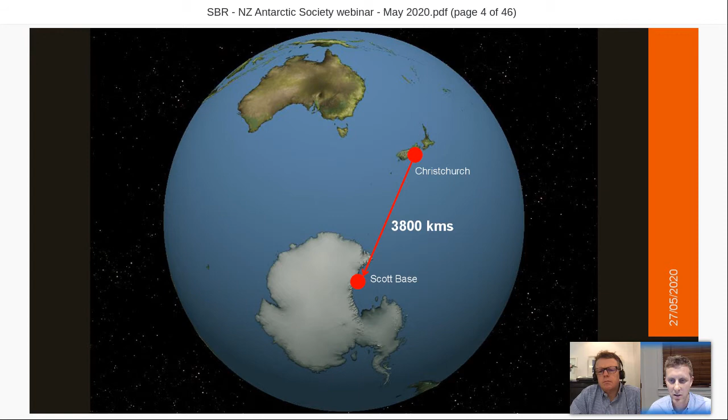Scott Base is located at Pram Point on Hut Point Peninsula, which is on Ross Island in McMurdo Sound. You can see it's at 77 degrees south and 166 degrees east, so it's the furthest southern point a vessel can travel to if they can get through the sea ice. We're very close to McMurdo Station, about 3 kilometres away, and we work very closely with the National Science Foundation and the US Antarctic Program, collaborating heavily on logistics particularly.

We have a thing called a joint logistics pool, where we share assets such as vessels and aircraft to move people and cargo to and from the stations, but we do operate independent stations. Collaboration is a really important part of working in Antarctica, and we work closely with a lot of other national Antarctic programs. That's really the only way things work well down in Antarctica, particularly for search and rescue events and so on, where everyone bands together and helps each other out. It's a very collaborative effort, especially for a lot of government agencies.

So the new base is intended to be located at Pram Point. We did look at other places to position the base, but we came back to Pram Point being the best location, and that's for a range of reasons.

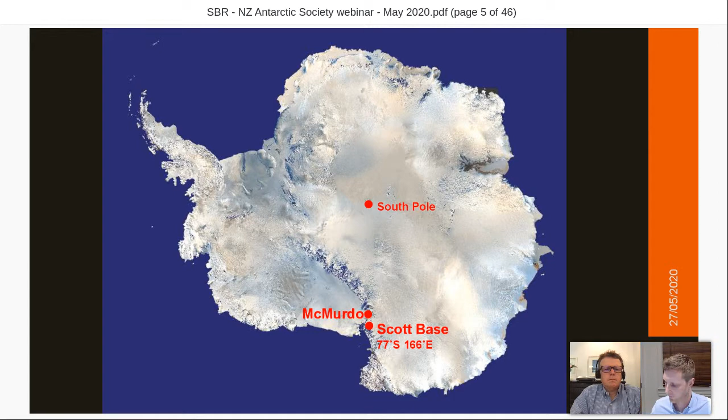So the history of Scott Base. Forgive me for those in the society who know this well, I'll give a high-level overview.

Scott Base was first built in 1957, and the team was led by Sir Ed Hillary. Its primary purpose was to support the Commonwealth Trans-Antarctic Expedition, known as the TAE. Scott Base was officially opened on the 20th of January 1957, which is the top middle photo there. It was also used to support a party of scientists participating in the International Geophysical Year, also called the IGY. Although it was only designed to last a few years, the value of Antarctic research was soon recognised, and a base rebuilding program began in 1976 to replace the original 1957 base.

Hugh and I are constantly impressed at the innovation used in designing and constructing the TAE hut, which is the building on the right-hand side. It was designed and built in under a year. They completed the buildings in Wellington and showcased them to the public so people could go through and have a look. Then they deconstructed it, moved it down on a vessel, and tractored the materials onto site, as you can see with Sir Ed behind the wheel of the tractor there.

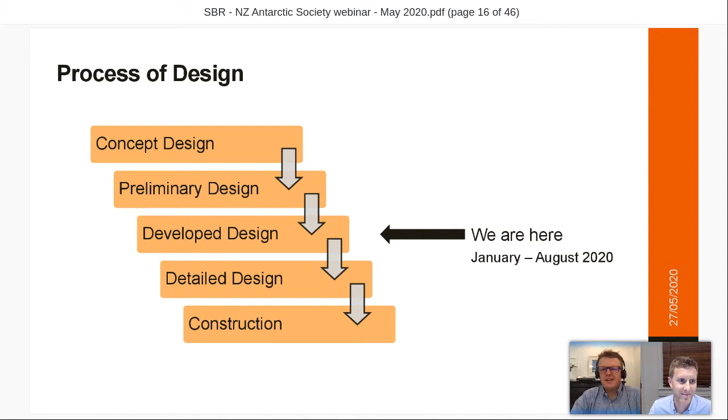Thanks, Si, and thanks for a fantastic introduction to the design process. I'm going to run through the design we've prepared. But before preparing any design, it's essential to determine the constraints which help decide where we can place buildings and the approach to design generally. So bizarrely, for a building in the Antarctic, Scott Base presents an enormous number of constraints to the design process. One would imagine that if you were building in the Antarctic you'd have a pretty free rein, but at Scott Base there are a number of factors which determine not only where we place the buildings, but also the form that they take.

There's a long history, as Si mentioned, associated with Scott Base, and that manifests itself in particular in two areas. On the one hand, there's the historic hut of Sir Edmund Hillary's Trans-Antarctic Expedition, and we want to make sure any new buildings don't crowd that important historic asset.

On the other hand, and crucially ongoing, the long-term science data being collected by instruments quite close to the base has also been a determinant on where we can put new buildings. Scott Base sits on the coast, so that in itself is a factor in determining where buildings can go.

Mindful also of the potential for changes in sea level and of the impacts of things like tsunami, that's also made an impact on how close we can place buildings to the coast.

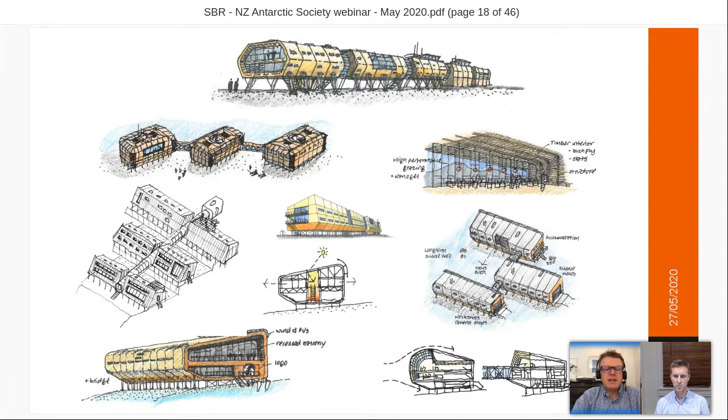Alongside preparing sketches and thinking about the areas and different spaces we needed, we also went out into the field. We visited a whole series of different science installations around New Zealand to get to grips with the kind of science that would be conducted at Scott Base, and to ensure not only that current science programs could be accommodated, but also that there was sufficient flexibility to support science taking place at Scott Base over the next 50 years.

As you can imagine, that is quite a challenge. It's hard enough to design around what we know, but to design for 50 years into the future is really quite something. The key to this is to provide spaces which we like to call loose fit - spaces which can be relatively easily reconfigured over the life of the base.

These are some examples of places we went to visit, facilitated by scientists within New Zealand - a fascinating visit to the NIWA Marine Lab in Wellington to see how they manage the use of seawater to support their facilities. We also went to Victoria University, to the new building supporting biological sciences, amongst many other installations we've visited to support the design process.

Scott Base has science facilities within it, but it also supports fantastic science out in the field, some of which is really quite far away from the existing facility. That science is supported by traverse activities using vehicles to cross the Ross Ice Shelf, and also by helicopter operations.

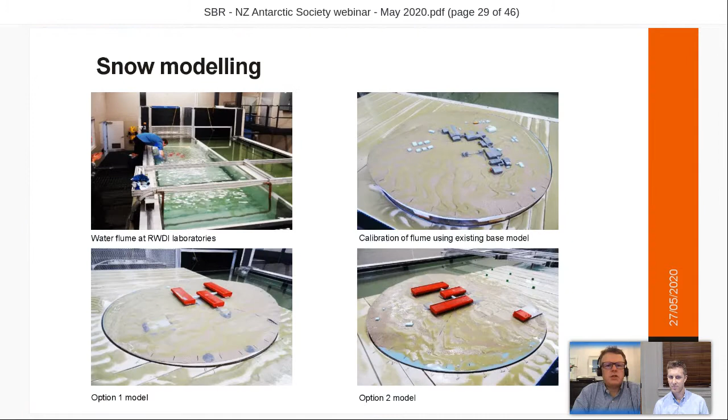So working with Steenson Varming, we've come up with a solution that's helped us reduce fuel consumption by making the most of passive energy sources, whether that's wind or solar energy. We've come up with a clear system logic whereby all the services are easily accessible and easily maintained, reducing effort to keep the base operational.

Resilience is absolutely key, so there are generators in two different buildings. We've got power from the wind farm coming into the building as well. The benefit of having those power systems in different buildings is if there's ever a system failure in one, you can rely on the power source in another.

We've also looked at optimizing services for winterization, so that when the population of the base might drop from 100 in the summer down to around 15 or 20 in the winter, it's possible to close down a number of those bedrooms or spaces which aren't being used, reducing their temperature down to above freezing, around 5 degrees Celsius, while requiring much less energy to keep them operational.

Some of the different measures we've got within the buildings include measures to reduce water usage, such as vacuum drainage and a mist fire suppression system, which starves fires of oxygen rather than dousing them with water. We've got combined heat and power generators, allowing us to capture heat off the generators themselves to use as part of the heating system within the buildings.

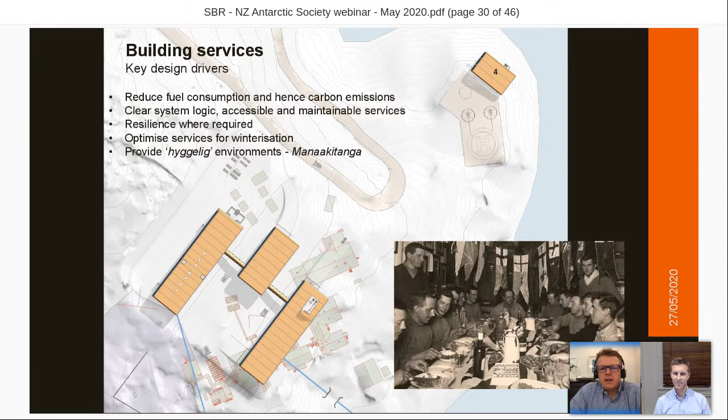Overall, the intention with this whole services strategy is to provide an environment which is really comfortable and supportive. Our engineers have their origins from Denmark, so they like to call it a hygge type environment. Although, of course, this is a building in New Zealand, so we like to think we're encouraging Manaakitanga.

This is a view of the exterior of the building on approach. You can see there are ramps leading into Building C on the left-hand side and to Building B in the middle - those ramps facilitate the delivery of cargo. The building on the left, Building C, is for cargo coming in from or returning to New Zealand, whereas the building in the middle is the science building.

So that would be items from the deep field coming back into the building or going back out into the field. On the right-hand side is the main accommodation building, which has a stepped access, primarily for pedestrians coming in and out of their accommodation.

This is the main entrance. As you can see, the buildings have a monopitch roof, lots of curved corners, and are elevated above the ground. That's all in relation to the wind and snow modelling, to ensure the wind flows over and under to minimize snowdrift around the buildings, reducing the effort needed to manage snow.

The primary entrance has quite a bit of glazing to it, which is an important feature to generate a sense of welcome - a key characteristic of the design of the new Scott Base. On the upper level is the main dining space and the bar, looking out over people coming to visit Scott Base for the first time, or returning people as they come back in from their work in the field.

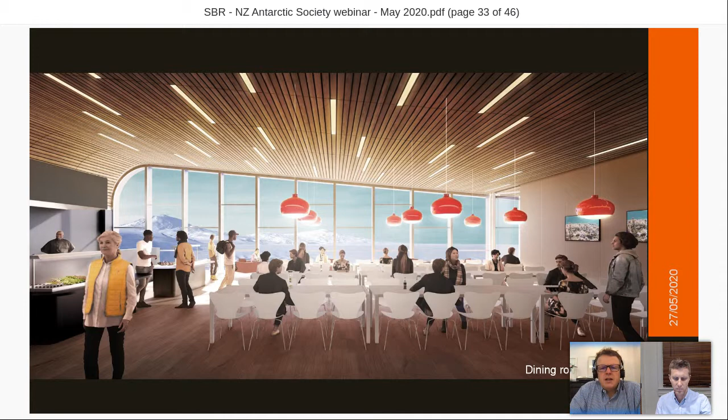Off to the right will be the bar, with big screens which open up to allow interconnectivity on some occasions and separation on others. It's really through a lot of discussion with people who live and work at Scott Base, both now and in the past, that we've arrived at these design solutions.

In terms of sleeping accommodation, there are two types. There are single rooms for all the longer term residents, with views out onto the landscape. The rooms are pretty compact, around 2 meters wide by 3.5 meters long, with plenty of storage and the option of either an easy chair or a desk, shelving, blackout blinds, and a towel rail to allow a little control of the environment within your own space. There are also lots of pin boards for putting up pictures and books.

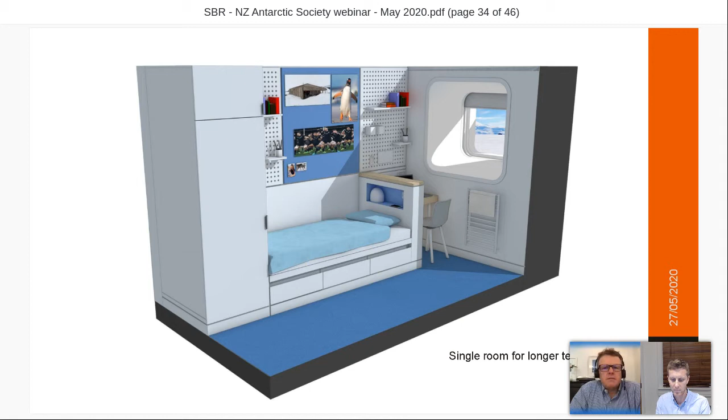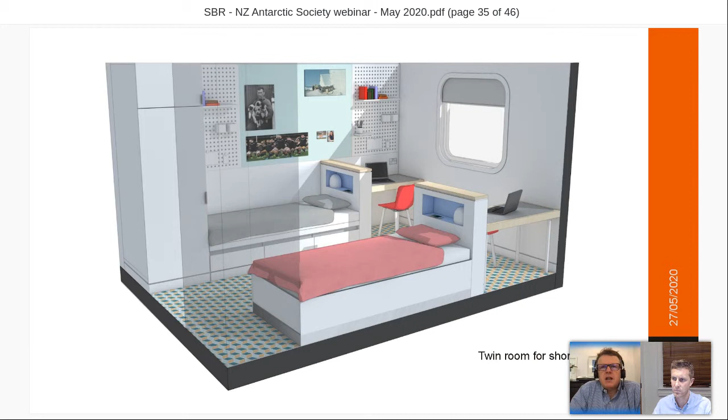Many visitors to Scott Base come for much shorter periods, passing through as they head out into the field on science events, or from other national Antarctic programs using the air link back to New Zealand or through McMurdo. For them, we've created twin rooms. These look into a double height space within the heart of Building A, so they get natural light, allowing for densification of sleeping accommodation for those there just a few days.

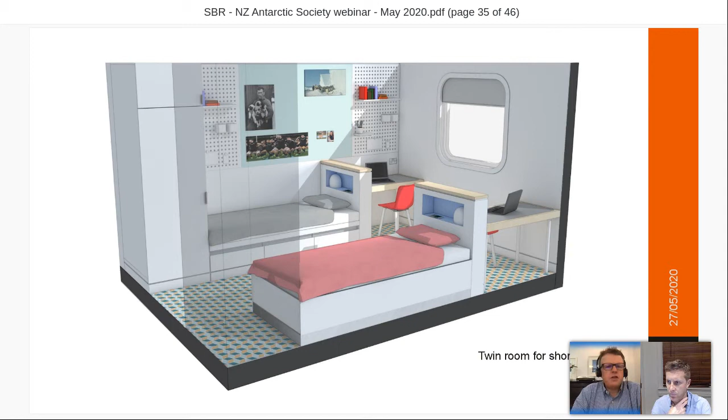Links are a really important feature of Scott Base, stretching back to Sir Ed's first buildings of 1957, and we've maintained that theme with the new design, with all three buildings connected by links. This is a view within the links, around 3 meters wide, allowing people to walk in both directions and cargo to be moved between buildings. At the center, panoramic windows let people enjoy the views in summer out onto the icescapes, or in winter, the spectacular auroral displays around Scott Base.

One thing we've learnt from working in a number of different Antarctic bases is the requirement to provide recreational spaces which support people's well-being at a number of different levels. At the new Scott Base there will be plenty, ranging from a digital lounge to a movie room, a hobby space, a library, a bar, a gym, and a fitness suite.

Those spaces are important, but it's actually the incidental conversations along the way which are so crucial to the success of the base—that time when you're walking across the link as a scientist and meet someone from the operations team who's able to help sort out a piece of equipment, or facilitate a move you need. Or an operations person bumping into someone from engineering, drawing on their experience to solve a problem at a particular moment. Making these linkways wide is important for that kind of incidental exchange and collaboration, which is a key ingredient of the base's success.

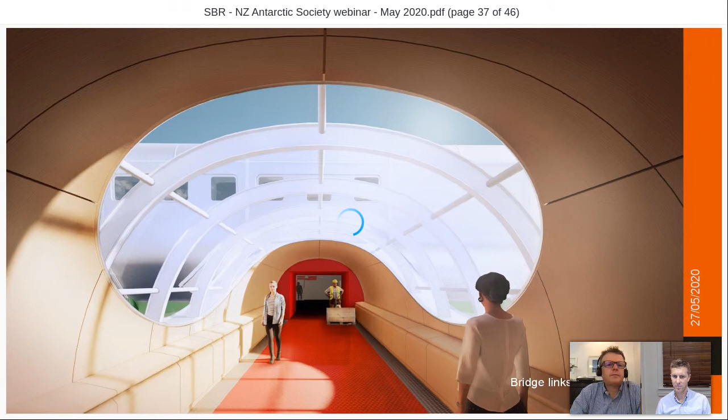As mentioned earlier, flexibility really is going to be a key feature of the new building, because it needs to support Antarctic science for the next 50 years. Key to that will be the event staging area on the lower level of Building B, designed as a big open plan space where people can get equipment ready before heading out into the field. In the center, there will be cages for equipment, clothing, tents, and so on, and off to the side, drier spaces for calibrating equipment and charging electronics.

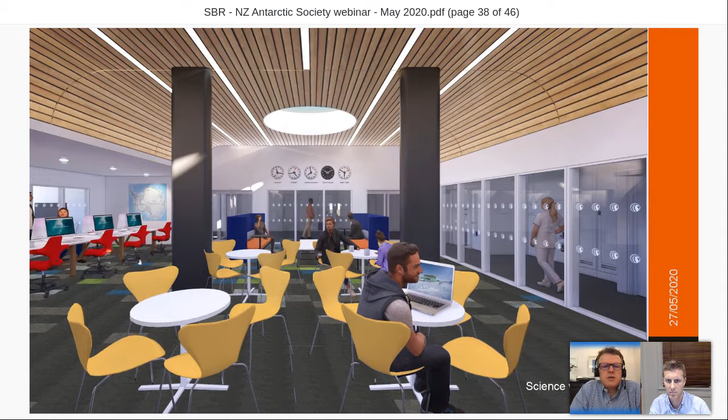And you'll see this recurring theme again of timber ceilings, potentially Southland beech, being brought into these more public spaces within the building to give that strong cultural reference back to New Zealand, but also a sense of warmth within this cold, icy environment.

One of the things I always find fascinating about Scott Base is that it has so many different activities that it needs to support. On the one hand, we're talking about sleeping accommodation, libraries and digital lounges. On the other hand, we're talking about laboratories to support cutting edge polar science. And on another level, it's an almost industrial type building with vehicle workshops to support those science events going out into the deep field.

For people's well-being, we've also included big windows from the gym and also from the trades office looking into that workshop. The reason we do that is because in the depths of winter, when the crew is down to around 15 or 20 people, having good sight between spaces is really an important way of ensuring people's health and safety. So when the mechanics are working down in this space, someone in the workshops can go, yep, I see you, you're safe, we're all together, we're in this together.

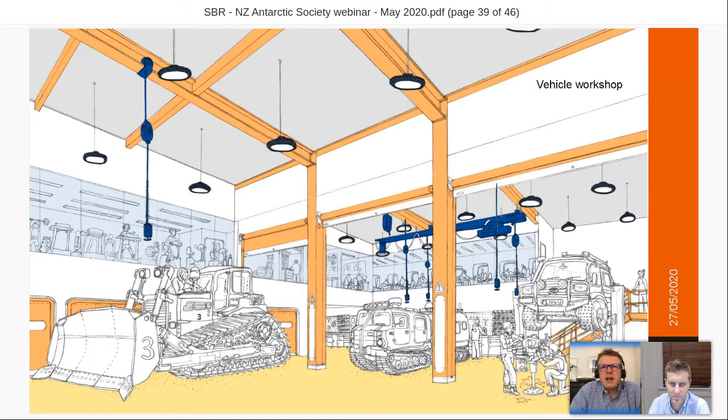And I think that idea of collaboration is not only important for fostering new ideas, it's also a key ingredient to ensuring health and safety of people working in such an extreme environment.

So all these ideas are all coming together at the moment. As Si mentioned, we're in the developed design stage, really heading towards that finalization of the design to help a contractor come on board with the project.

So hopefully that's given an overview of the architectural design. I know, Si, you're just going to give us a bit of a view on some of the engineering features now. So thanks.

Thanks, Hugh. So the civil design is really important and very unique. The base is founded on permafrost. There's what's called an active layer, which sits at 0.5 metre, or 500 millimetres, below the surface. That's an area of basalt and scoria that freezes and thaws every year.

So the foundation solution that the buildings sit on is quite complex, and we've carried out a number of site investigations, such as coring the permafrost with a drill rig down to 10 metres to understand the material below the buildings. We've done ground penetrating radar, LiDAR surveys, and a number of other investigations.

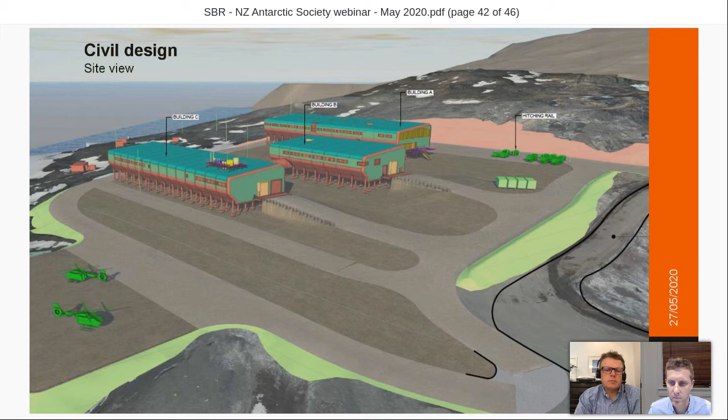So the structure, we did investigate looking to use timber. There's a product called Accoya, but there were a number of issues with it, such as humidity, where you'd get shrinkage coming from temperate climates down to Antarctica. We've got some material down there that we're testing at the moment, but the structure is proposed to be steel.

So it's on a regular, repeatable grid at 6 meters, which helps with speed of construction and ease. So you have a lot of similar components, which also ensures that the cost is as reasonable as possible. We're not looking at a whole lot of bespoke design for certain areas.

It's also a critical component for life safety. So because of the remote nature and very cold environment, the building is designed to what's called an IL4, or an importance level 4 building, which is similar to a lot of other structures that are important for people to use in the event of a natural disaster.

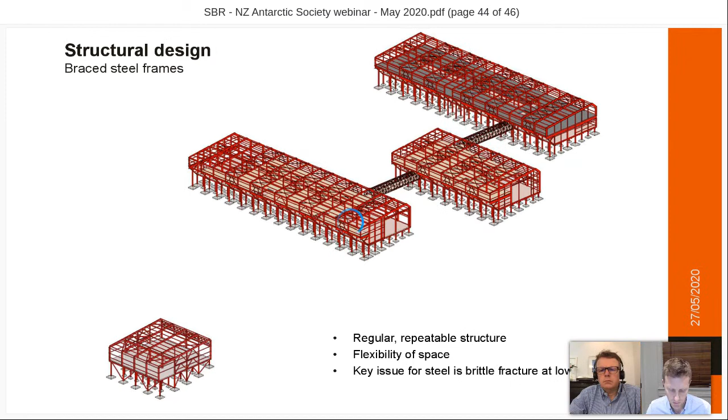So construction, we're in the process of confirming the construction methodology, or how the buildings will be put together and where they will be put together.

So this would require a high number of tradespeople on site, combined with a constrained period where you can actually do these sorts of activities outside through that summer period. So it's usually from November through till the end of February, a very short window in comparison to building in New Zealand.

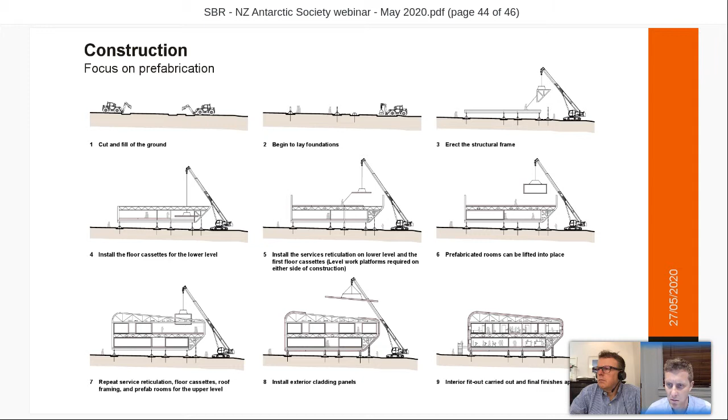At the other end of the spectrum, we're also looking at options to move large modules or whole buildings. This is done a lot for industrial projects in the Northern Hemisphere, where you use a roll-on, roll-off method. This has a number of benefits around quality and speed of construction, but it does have a different logistics component to it as well. Once we've confirmed that, we'll share that with the public.